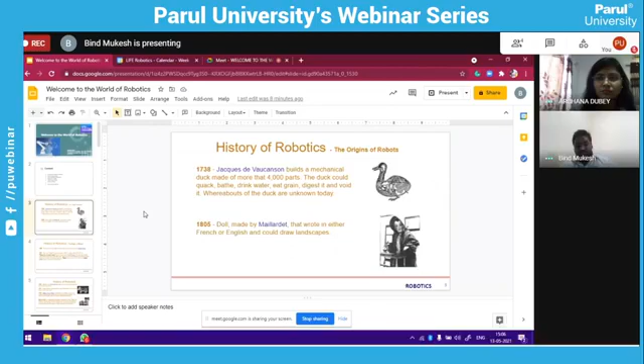So robots are divided into categories. One is automatic, and second is where we need an operator to control them. These are operator-based robotics, where you continuously need to control them. When we come to automatic, that means you have given your code, your instructions, your program, and things are automatically moving. And when we say radio control, it's kind of semi-automatic.

Even the semi-automatic robots or projects started in 1898, so again it's a long time ago. Robotics is not a new word, but now we are using it everywhere. It is in your hand, your mobile phone, with your vehicle, with transport, at the hospital. We are using them everywhere.

So we'll quickly come to the current areas of robots where we are using them, and we'll see how to make some of the robots and how it can help us.

This is again the history, the evolution part, the revolution part, where industrial robotics started. Industrial robotics like the robotic arm was widely used, and it is still widely used in car manufacturing factories. This part has pushed our industries into a new era. Now almost all manufacturing industries are working with the automation process, using robots for making their components.

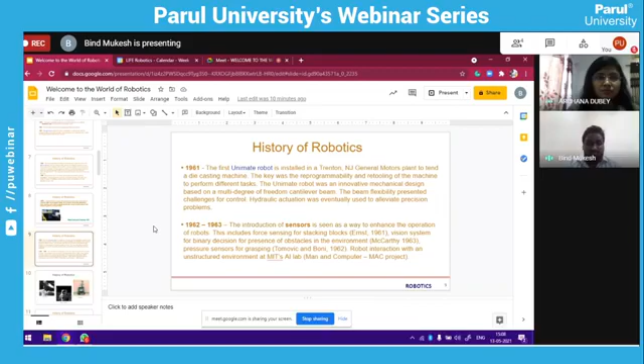Again, we are still seeing the history. You must have heard about the Unimate robot. This is because we learn these things as a part of history.

Coming to the present, these are some present examples of robots. As I told you, when we say robot, that doesn't mean it has to look like a human being. A robot can have any shape. The main thing is it is following our instructions, we are able to control them, or it is helping us, or in some way solving our problems. So we'll watch a few videos and see how these things work.

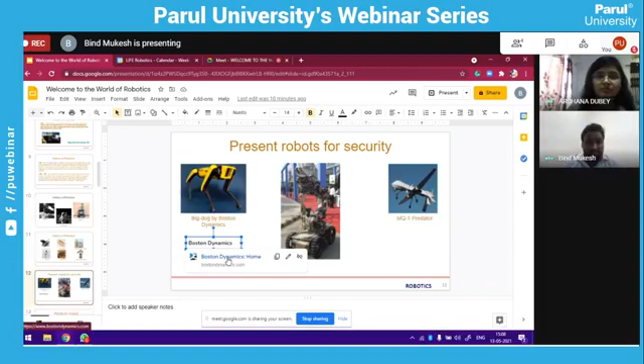This robot is from Boston Dynamics, it's the Boston Dynamics Big Dog robot. Let's see some part of it, and we'll come back to the presentation.

Initially we'll see some of the interesting, cool robots which are under processing, testing, development, but they exist. After that, we'll come to the next part where we'll see how to make these kinds of things, or their small prototype versions.

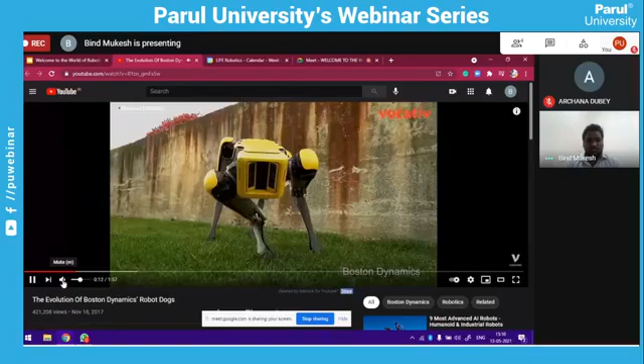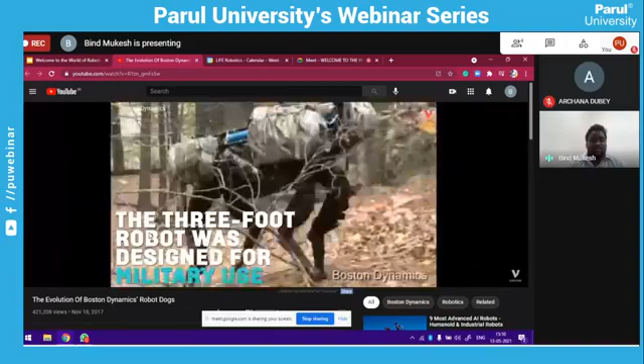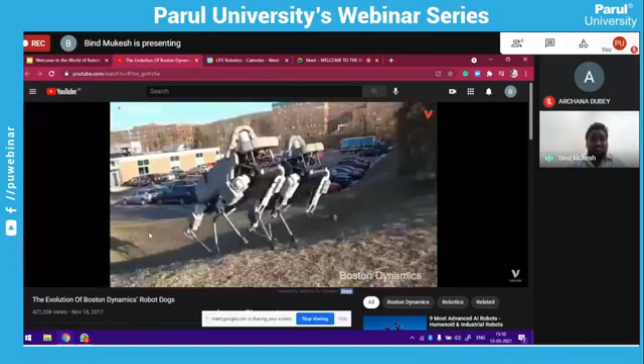This is a Spot Mini robot made by Boston Dynamics, a company that makes these kinds of robotic animals, or even humanoid robots. Mainly they make a walking robot that can see things, sense surroundings, follow instructions, and carry load. You can use these kinds of robots for carrying loads with you, or they can help at manufacturing industries, factories, security purposes, infection control, and other places. Even Boston Dynamics has many projects running for military purposes, making robots for the military.

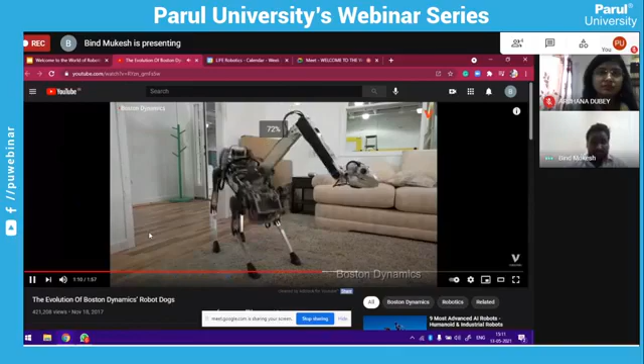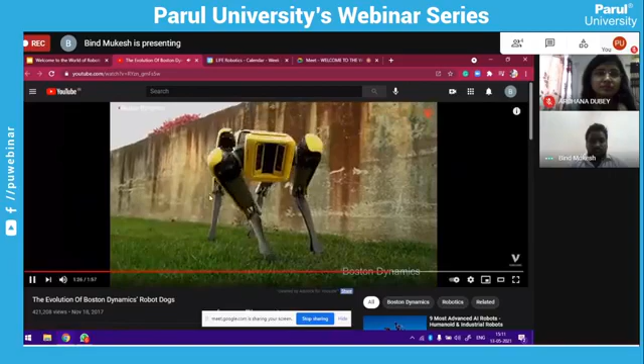So these are the current areas, what kind of robots exist and how we use them. We can use these for daily life, in industries, hospitals, or for personal purpose.

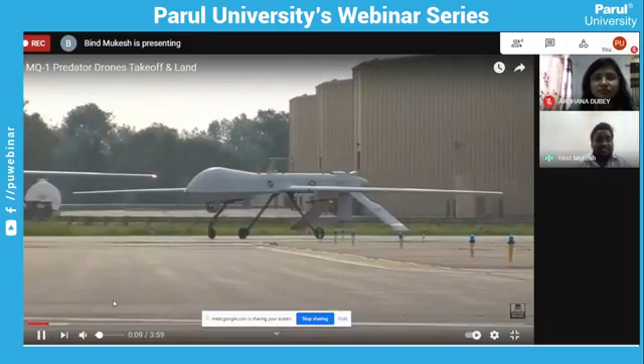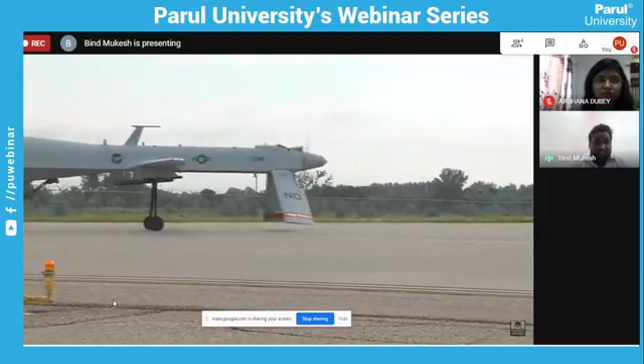So flight robots have a totally different area, and flight robots or flight machines use most of the sensors with their feedback mechanism and programming. Very high level of accuracy is required for these things, because when you are not on the ground, a small mistake can damage everything. So they are equipped with a lot of sensors like pressure sensor, temperature sensor, GPS locations, cameras, remote control system for broadcasting, sensing surroundings, and radar system. We use a lot of sensors in any flight control system, and this is one of the most advanced, used for war purposes. It's a drone.

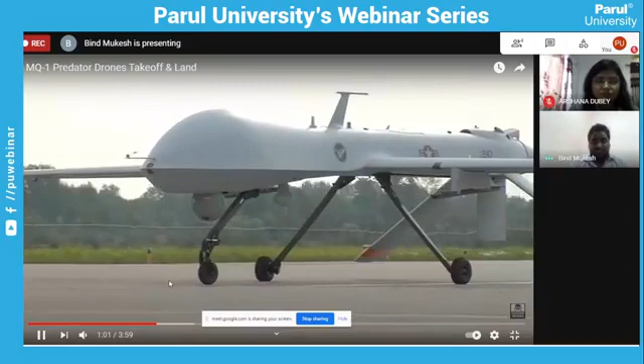I will show some flights and then we'll go to the next part. So this is flight in action, as you can see.

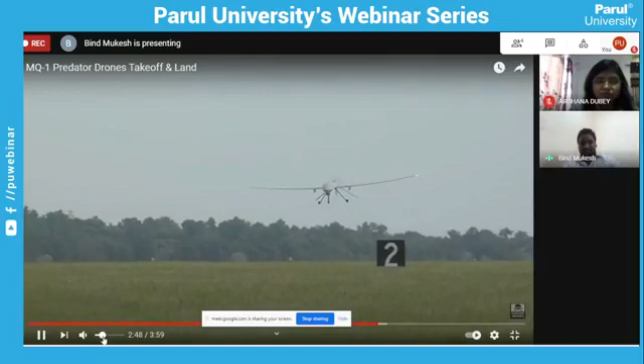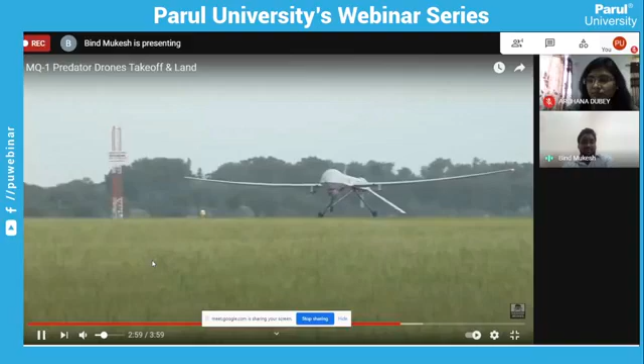The most important part is it can fly for long hours, up to 28 hours, with a speed of 260 kilometers per hour, non-stop flight, and it can give you real-time data. You can use it for surveillance purposes.

Okay, this is a totally different area when we talk about these things, like a robot remote control flying robot. That is a completely different thing.

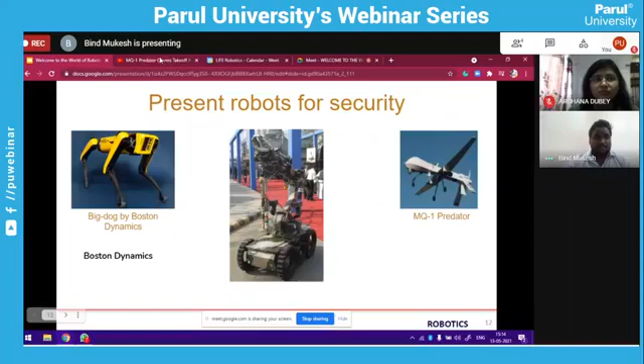So these are the robots for security. Now next is robots for the medical field.

This is a Da Vinci surgery robot. Even robots are used for surgery, where we need too much precision, or where a person is not there to handle or operate the surgical operations. In that case, we can have the Da Vinci surgery robot. This is one of the most famous and advanced surgery robots.

It has multiple arms, and all these arms are controlled by different finger sensors. Those sensors are over here. You can see this person sitting in a cabin, and this cabin is equipped with multiple sensors and some radio transmitters, we can say.

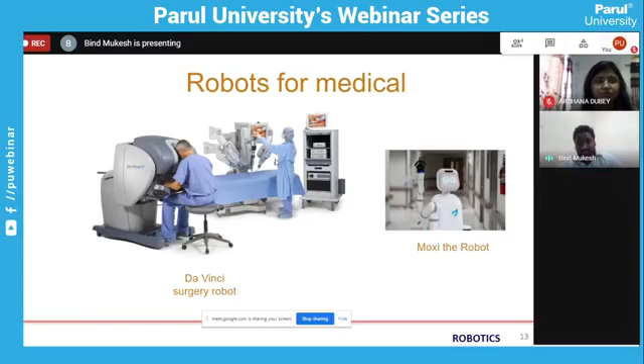From here, he's trying to control the motors connected to the second part of the robot, where the robot performs operations. In that second part, there are motors, controllers, and a receiver. This person sends commands with his fingers, and those commands are received by the control receiver, which transfers them to the controller, and the controller controls these motors.

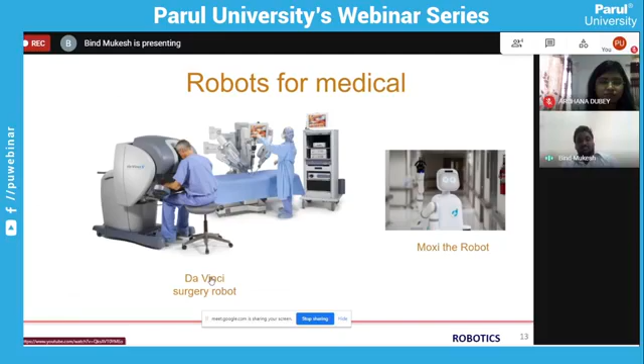There are lots of motors connected to this robotic arm to make different movements so it can perform operations, and at the same time the person can see what is happening there. Those arms are equipped with cameras sending real-time data so the person can watch from here. Let's see a small video of this also.

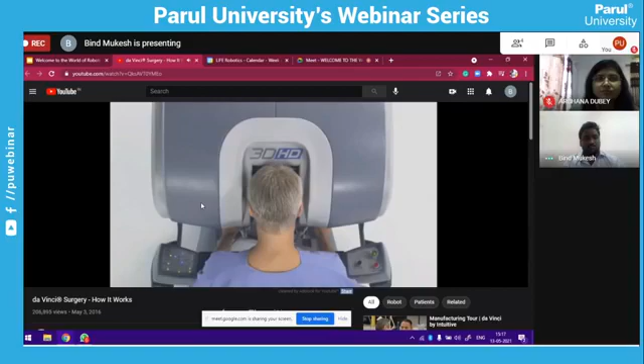Later on we'll see how to make this type of remote control robot, or the remote control robot arm system.

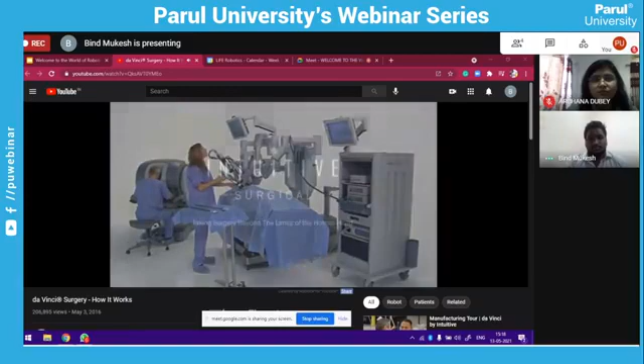So robots are not limited to one place. Nowadays they're almost everywhere - in the field of medical, war, entertainment, education, innovations, space, underground, underwater. There are people continuously working in these fields, and every day they are coming up with new inventions or making something new.

So these are the robots for the medical field. Like this is Moxi, the robot. This kind of robot is used in hospitals in the place of a nurse. Suppose there is a shortage of healthcare workers, like nowadays we are going through this COVID crisis, so we have the shortage.

In these kinds of cases, we can have robots, and the robots can help us. They can deliver medicines, or deliver basic reports like your body checkup reports, and they can help doctors. They can move with them, carry the medical stuff for them. So we can use them at hospitals also.

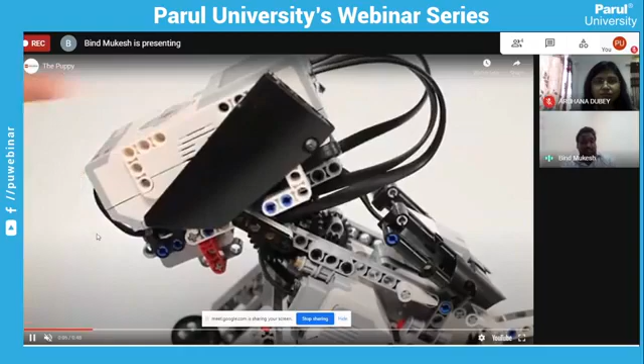So again, this is a robotic animal, and this robotic animal is making different actions. So there are sensors, and you can see this person is doing something. First he is pressing buttons, and that time he is running the program. So there is a code and the robot is following that code. We need to give the instructions.

Next he is coming and pressing this part. There is one sensor here, and this sensor is programmed to do something. So when you press these things, this part is going to be checked in the code, and your code will check what to do when the touch sensor is pressed.

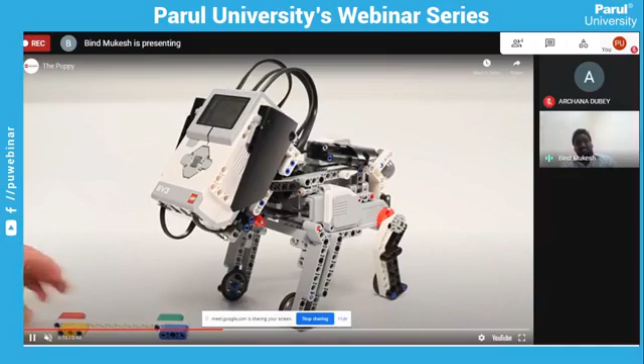Next he's showing some colors, so there must be a color sensor somewhere here. That color sensor is sensing these colors. So when he's showing different colors, like when he showed green, then he's making this kind of actions. Now again resetting by pressing the touch sensor and showing another color.

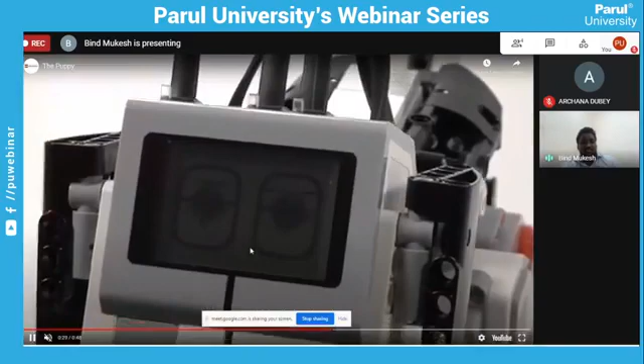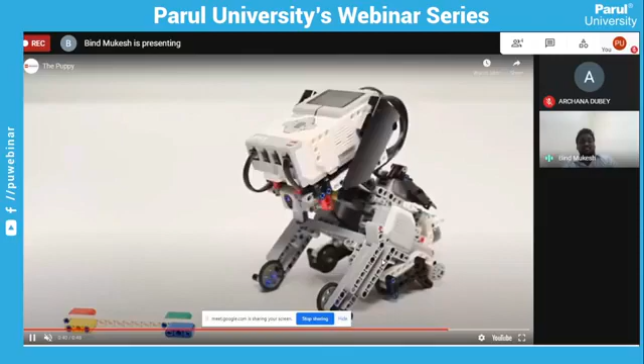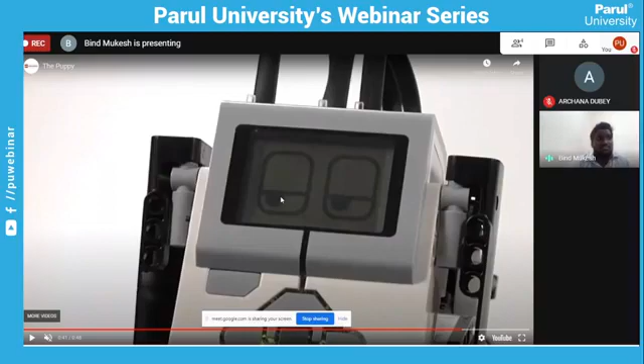Now this time he's just sitting down and making heart emojis. So this robot is programmed to do different actions when it is sensing the colors. Same way we can give our own instructions, like it can be controlled with a sensor or we can control with remote. We can ask it to do different things like this one.

When we see other robots, let's watch the Honda Asimo robot.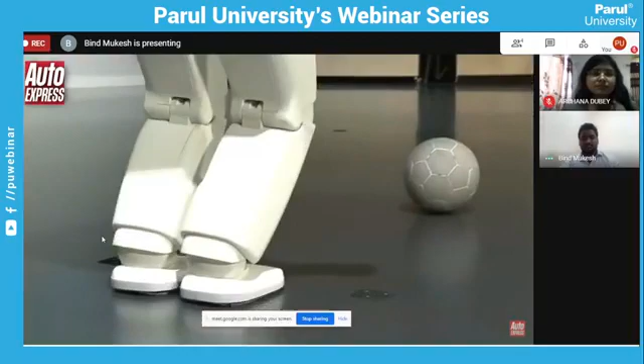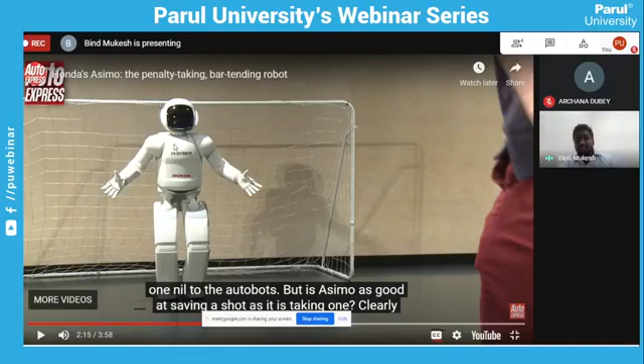Okay, so I hope you have understood what they are trying to show here with the Asimo robot. It's a humanoid robot that can be used for play, for fun purpose. We can play games, sports with this robot, or you can ask it to do different things like picking up objects or move around you, do something for you, take small steps. It is equipped with so many sensors, cameras that give real-time data, and this is a kind of completely automatic robot.

So there is no remote to control it. It is following its code, and based on the sensors or based on your movements, like if you show something to stop, then it may stop there, or if you give instructions to just sit down, you can show some gestures or some kind of emojis. It can detect and follow the instructions. So these are for entertainment purpose.

Now coming to the next part, robots for space. This is also one of the very famous things. But exactly what we have to do here - this was just introduction, like where we use the robots. So we are using it everywhere nowadays, from your mobile phone to spaceships, everywhere we are using them.

But how to build these things? When it comes to building a small design or any prototype of a robot, there are three things we need to consider, and these are the core components of robotics. First is the mechanical parts.

As you saw here, these robots have a shape - they can have any kind of shape, not a fixed dimension, but they have a shape made of a few materials, and these materials are processing a mechanism. So there is a concept of design, kinematics, dynamics, actuations, degrees of freedom, levers, joints. That is a part of mechanical engineering, which covers almost one third of the robot - the designing part and the movements.

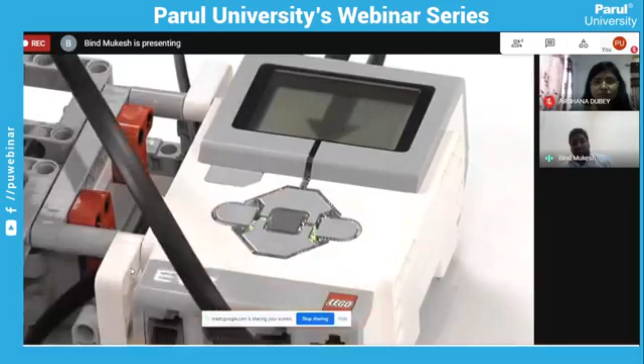We have two more motors here. One motor is moving it up and down, this is also a servo motor. There is one motor at the base, the bottom part, which is moving it left and right. When you press the down button, it moves left. So there is one more large motor moving it left and right.

All these motors and sensors are powered and controlled by the brick, which is the main controller here. It has an ARM based controller controlling the motors and sensors, and these are connected through ports, you can see the wires coming out. The controller is the main part, the heart or brain of the robot. It controls the motors and sensors, and the mechanical parts give it a shape to perform a specific operation like pick and place, running, jumping, or anything like that.

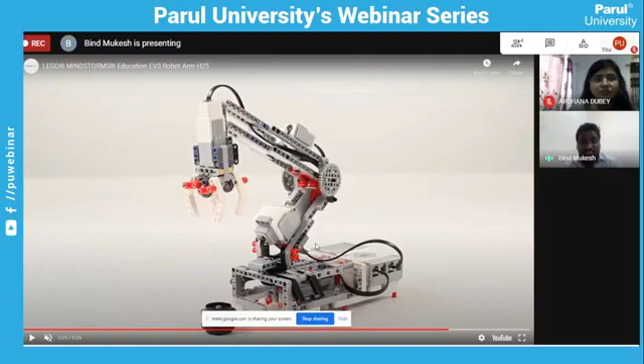There is a coding part. This robot can be programmed with C, Python, Java, or even simple block codes. The block codes are very similar to making PLC codings, it's a ladder kind of code.

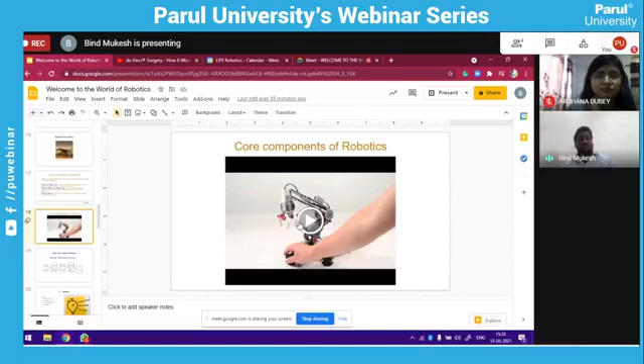So here we saw where are the mechanical parts, where are the motors, where are the sensors, the gears, some beams, and the controllers. So when we say robot, that is made of three things. We need all these three things to make one structure.

Sometimes it is difficult to find out all the things. If I'm a mechanical student, I can easily find out the materials, the beams, metal, chassis, or plastic to make the structure. But finding electrical and electronic components, sensors, and writing code can be difficult, that's a challenging task. It's not impossible, we can obviously do that, but it's challenging.

And when we say we are from electronics, then we can easily make projects using the controllers, using the motors, using the sensors. That is easy for us.

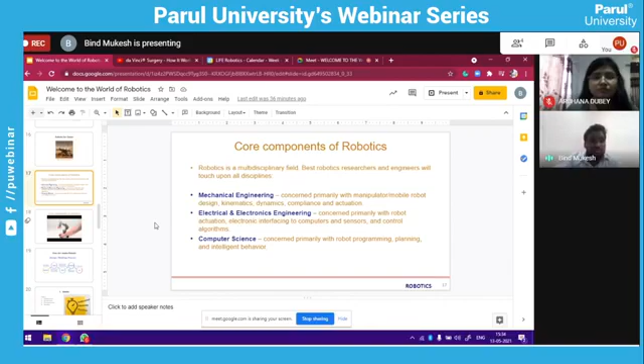So if you can make a group of different branch students, then you can easily make a complete full version of robots. Otherwise, we can go with small projects. So today we are going to see some of the projects, like how to make our own robots, even when we don't have these kinds of materials, or we don't have the Lego kits, which is difficult to get. But still we can make some robots, we can make some projects at our end.

Before starting any design or any project, first of all we need to work on the problem statement. Exactly what is the problem? As we discussed, robots are machines that are helping us, or making our work easier. So we need to find out exactly what our problem statement is and what we have to solve here.

Define that thing, and then come up with an idea, like what things can be added - if I add some motors, or some sensors, or make a mechanism, or change the process, the way it is working. So how to solve these things, that's the main solution part. It's like a rough idea - we need to make a rough diagram of how to solve those things, and then we can go for the prototype.

So prototype is the place where we start collecting some material from the market, we start joining them together, and then we make one of the simplest versions of the model or of the robot, and then we come to the testing part. So these are the phases we have to follow. It's better to go through the steps rather than coming from the last step to the first step.

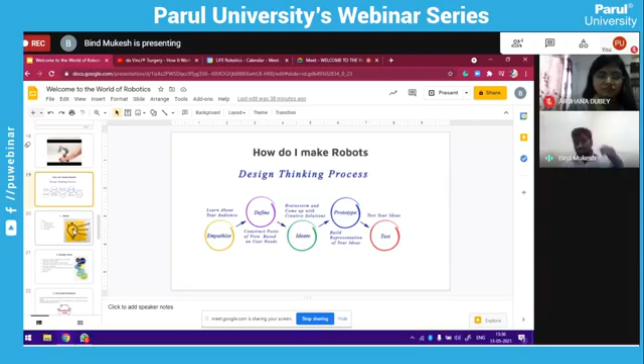So we'll see what are these things. As we discussed, ideas - we need to define that I want to make this type of robot. So you can decide the topics. You can select topics based on global issues, or based on some social issues, personal issues. You can build for security purposes.

So global issues - nowadays, if we have to make a model that can help us with some COVID problems, like COVID is causing oxygen problems, so we can work on an oxygen concentrator. Nowadays there are students, my students, who are working on these kinds of projects.

Social issues - everybody is trying to maintain social distancing and other things. So we can think of creating some applications or projects that can identify whether the rules are followed or not, or that can give alert systems. So we have to decide our topic first.

See what kind of topic, what kind of problems you have, and then see the topic - is this kind of issue - and then go and research what kind of solutions are already available in the market, or go through the internet, and I'm sure you will find some solutions that already exist. Then study those solutions, because that study part will improve your design. Rather than starting a direct designing part, it's better if you go through the process and find out the old solutions and work on those things, and then find out if there's anything missing in that solution, or what is new in your design, what is new in your idea. Then we can think, or we can work on that.

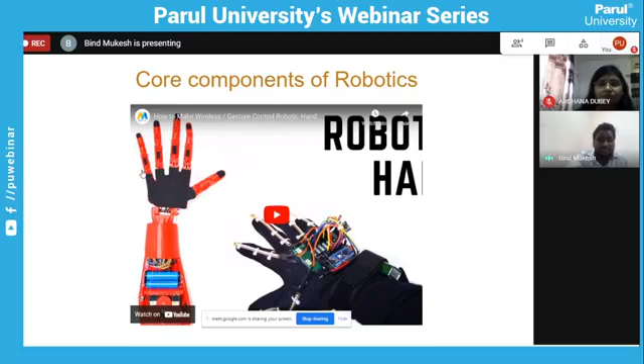Another part of this communication is connected here - that's the receiver part, and it is receiving those values and giving information to another controller, maybe an Arduino or another controller used there. So those controllers are receiving the values and controlling the motors, which are connected somewhere here with the fingers. So when it receives a reading from one sensor, it controls motor A; a second sensor gives some value, it controls motor B. So it is controlled in this way.

This is a normal diagram of a prototype - just one kind of prototype. Now we can use these components and make different kinds of prototypes. Whenever we work on a prototype, the most important things are finding the controller board you are going to use, and what kind of sensors can be used, because sensors make it easier for us by sensing the surroundings. If you add the correct sensor, you can make it easier compared to others. These are some of the sensors you can find, and I think you can pick any sensor and make at least 10 projects. There are a lot of projects that can be built using sensors, and if you add extra sensors, you can make it more advanced. It depends on our problem statement, what kind of things we need.

So multiple sensors can add more value to your project - multiple sensors with correct use can add more value to our robots. So now we will see some videos of robots that have too many sensors, multiple sensors, following a complex mechanism. This mechanism was simple, where we are controlling the motors, but the world is not limited here. Nowadays we are using different kinds of mechanisms, some of which are really advanced. Let's watch some of them.

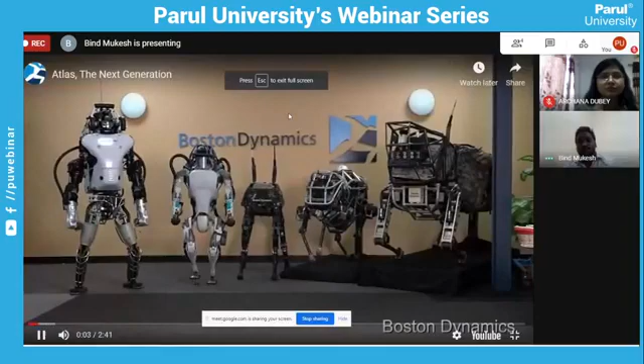So again, this is a part of Boston Dynamics, and we are showing the walking robots of Boston Dynamics. This project's name was Atlas.

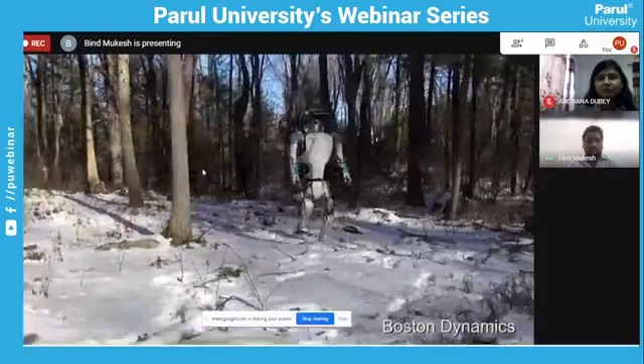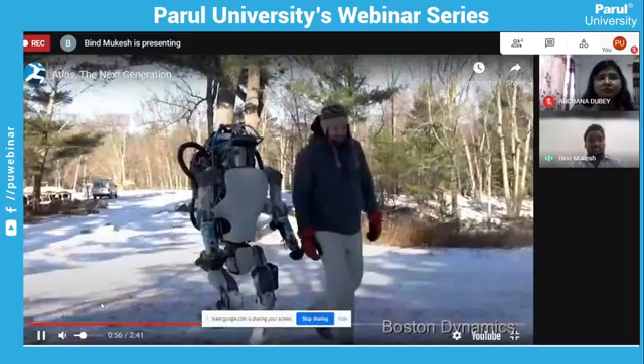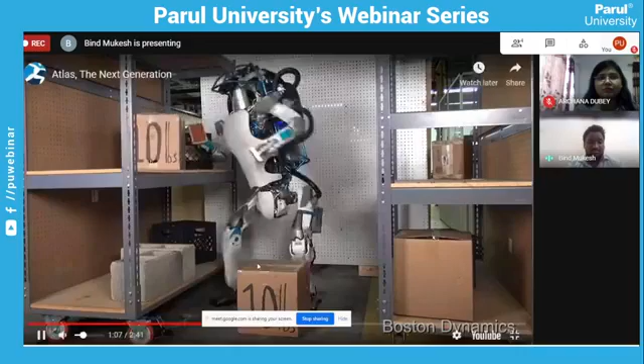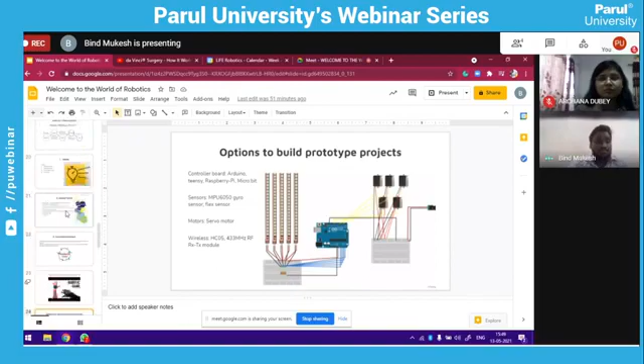So seeing these things is good, but we know these are using very advanced processes or mechanisms. So we should go with the simple version. We should pick up small components like motors and sensors, try to connect them, find out exactly what the problem statement is, and what kind of mechanisms are needed for these things. Come up with innovative ideas, build a prototype, and go through the feedback loop where we can test and make improvements.

And these things can help us in making these kinds of structures. So these robots are not limited only to complex mechanisms. Nowadays we are controlling everything with the mobile phone or the laptop, and we are controlling them from remote areas - it's like the distance part.

It has increased, you can control it from the other corner of the world. So these kind of things are called Internet of Things. And this Internet of Things is now merged with robotics.

So we call it Internet of Robotics instead of things, where we are controlling our robotic projects. It can be live industrial robotics, or the real-time data of your vehicle, or the sensors installed at your farm, or a sensor installed in a patient monitoring their heart.

These things transfer data on the internet cloud, and that cloud gives those informations to our mobile phone, so we can control them. So Internet of Things is a system of connected devices, computer sensors, and digital machines that transfer data over a network, controlled with some digital gadgets.

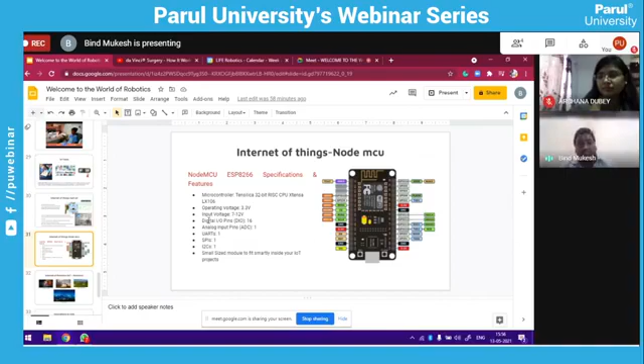Or if you're making a project for testing purposes, or used for a limited time period, we can use Node MCU. Or if the things are going to be completely application based only, you don't need any hardware, then you can use IFTTT tools. So we need to find out exactly what our requirements are, and then based on that, you can select what kind of IoT tools you need to build them.

So this is, I was talking about the industrial robotics, the IoT plus robotics, that is called Internet of Robotics. Nowadays we are controlling manufacturing industries, we are seeing all the manufacturing industry real-time data on our mobile phone. What is the current status, how many products are manufactured, how many are under process, or how many are faulty or not manufactured properly - we can see all this information just by one click. That is possible with the help of IoT. We are using it to control remote areas, remote locations, or for making smart cities.

And at last, I would like to show some of the innovations, these models made by the students. They are just 13 to 15 years old students. Let's see these videos. One of the students has made this robotic arm, a prosthetic robotic arm. Let's watch this thing.

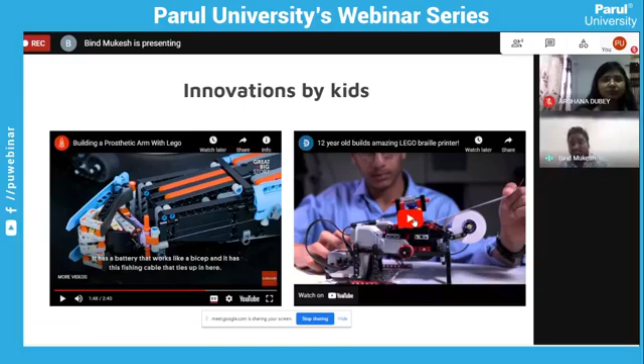So he had made a braille printer. He made a design of the braille printer using Lego parts, and later on this design was adopted by Intel, and Intel started a new company where he became the CEO of the company at the age of 12 or 13 only. Now they are planning to make a simpler version of the braille printer. If you go and find out the braille printer's cost, the actual cost is around 2.5 lakhs, that is just because of the mechanism, the way it is designed, and those things are very costly. So he replaced all those costly things with very simple parts. Let's see this video, let's see the inventions.

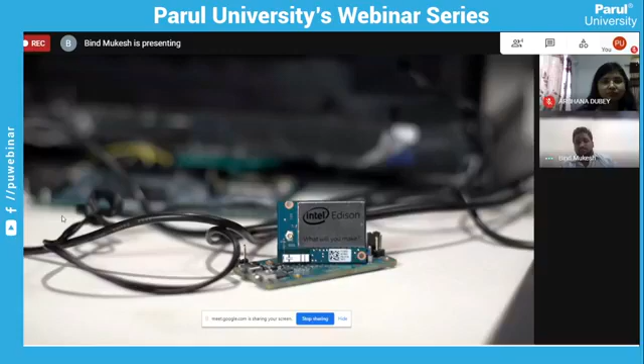Okay, so this is the thing here. These are the innovations made by the kids. So it's not limited here, even school students are also making these projects. So you are in college, you should definitely work on these kind of projects where you can make something better, or you can try this kind of models.

Now I will come back here, Archana madam. Hello. Yes, Archana. Yes sir. So is there anyone who has any doubts or anything? If you want to ask anything.

Everyone is being streamed through the help of this Facebook, sir. Okay, great. Yes, so that's it, over here we have all seen these.

We understood about robotics. So first of all, students, those who are here, I would like to say one important thing - don't get involved only into the theoretical part of your career. Whenever you're getting involved in your career, in your field, go deeply with something practical. You have to gain practical knowledge with you, because nowadays to increase your skill, practical knowledge is very much required. So in that part, robotics is playing a very emerging and important role whenever you are getting involved in technical skills.